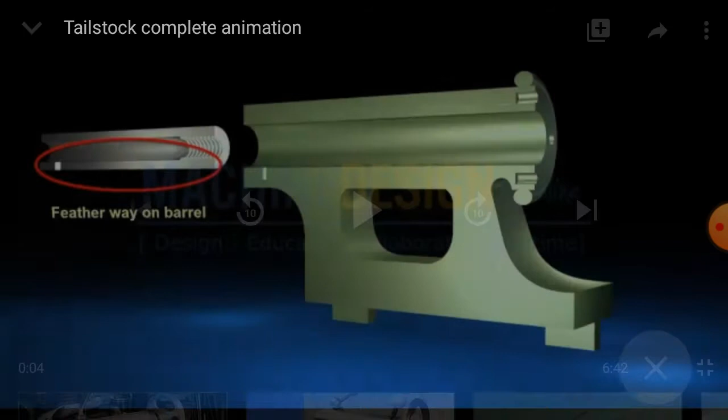If you observe this, tailstock is the rear portion of a lathe machine. I think every mechanical engineer is familiar with this tailstock. Without having a tailstock, a lathe machine cannot fulfill its complete work. So a lathe machine has a headstock as well as a tailstock. Tailstock is at the rear portion and headstock is at the front portion. Workpieces are going to be kept between the headstock and the tailstock if the length is very large. So tailstock plays a vital role in performing machining operations on the lathe.

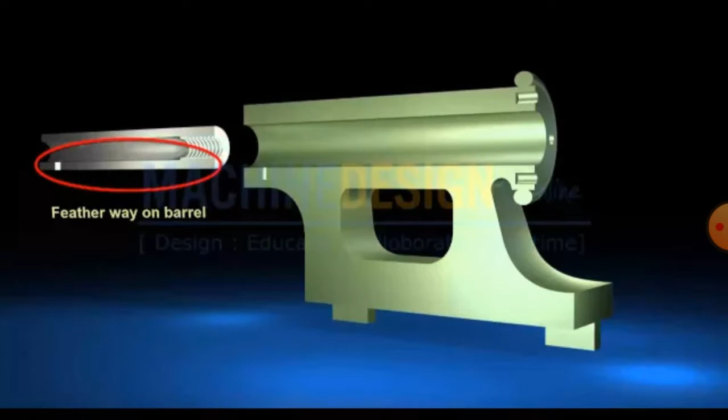So lathe is one of the widely used machines, or we can say one of the familiar or useful ones to all mechanical engineers. As a part of this assembly diagram, I have taken this tailstock in this class. Why this tailstock? It has nearly 7 parts which have to be assembled. So let us have a look at how assembling is going to be done in this tailstock portion. If you observe this one, tailstock is going to have a number of features.

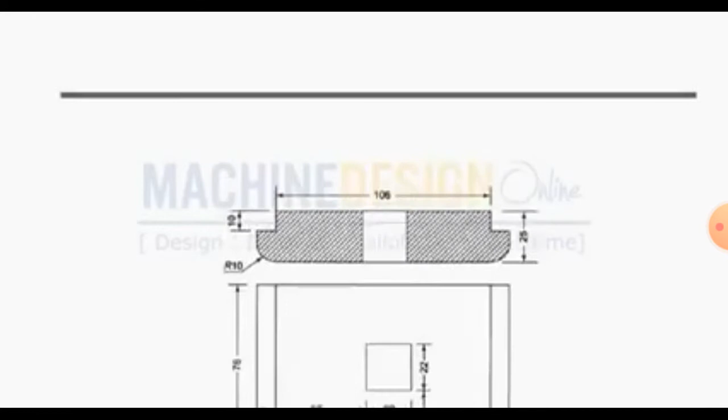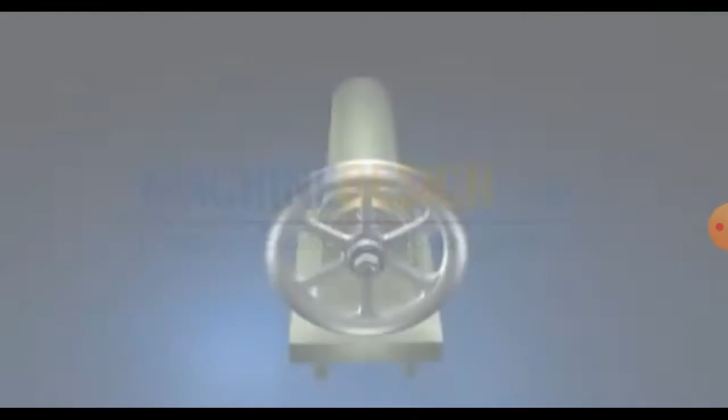First one is called the body. Second one is called the barrel. Third one is called the spindle. Next one is center. Next one is nut. And next one is the clamping plate. Next one is the spindle bearing. And next one is washer and feather key. And a hand wheel is there. So all these have to be assembled in the given body. So if you observe, this given body contains center, hand wheel, clamping, screws; all these are going to be assembled.

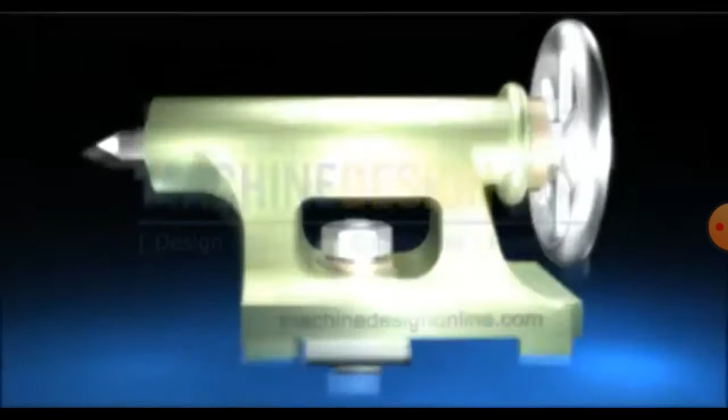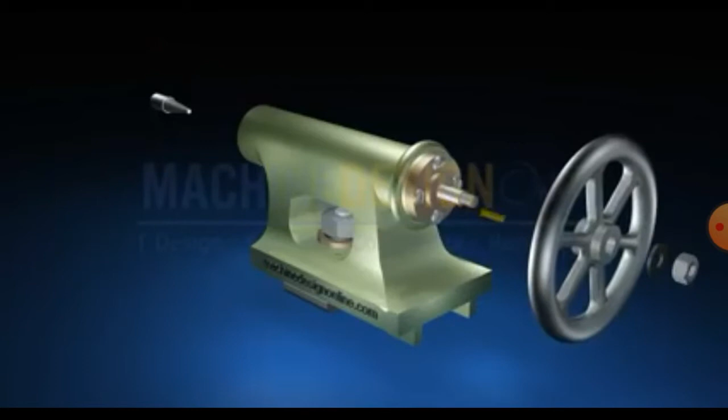Now you are going to visualize how the line diagram of this is observed in the form of grid lines I have shown. First one, this is called a center, which holds the workpiece at the rear part. This one is called the nut and washer. Now we are going to see how these are disassembled. This is the hand wheel and we have a feather key, screw. Those are going to be removed from this one if you observe this video.

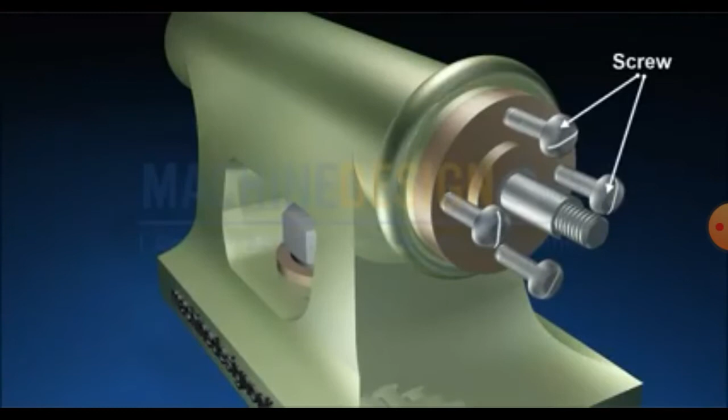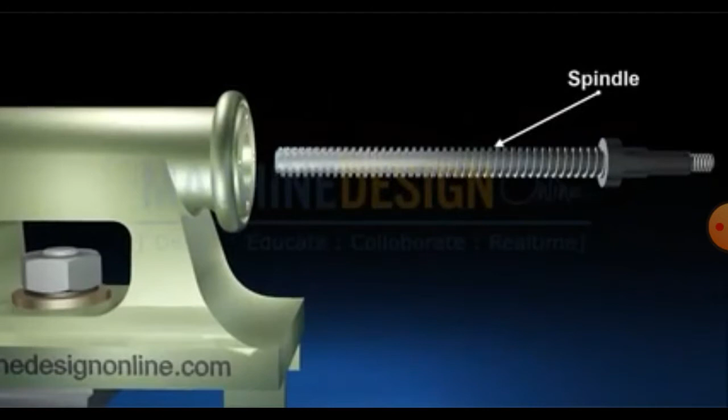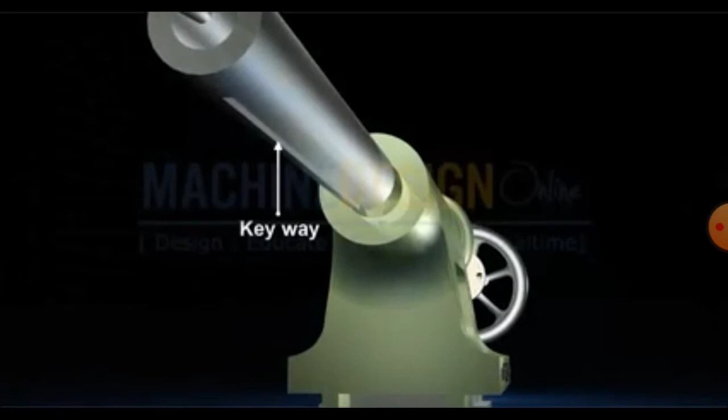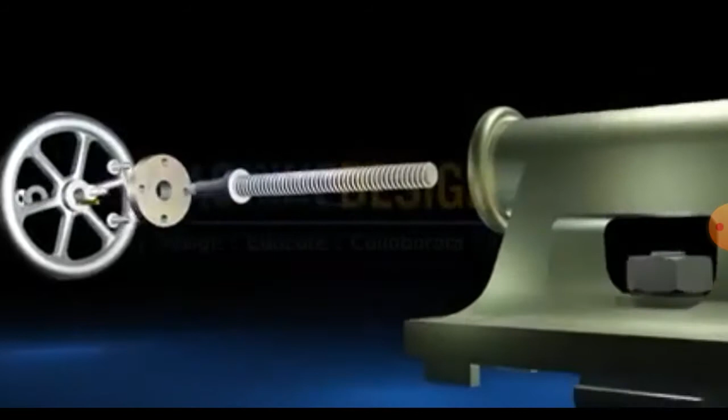Next, we have a barrel. That barrel is assembled with a spindle bearing. We have removed this spindle bearing. Thereby the spindle comes out of this body. Next one is in the front portion. We have a barrel. Already I told this barrel is assembled to the main body. In the barrel a slot is there for a key, which arrests the motion of the barrel.

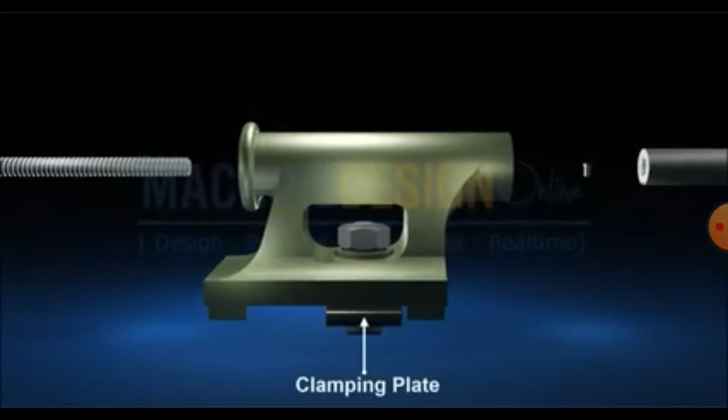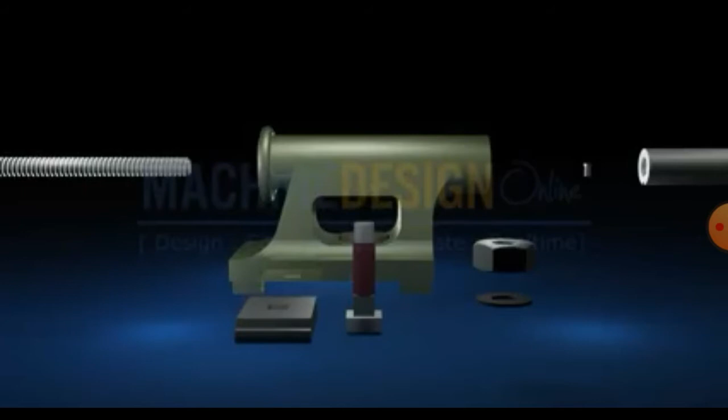So if you observe how the parts are, all these parts have to be assembled here. This is the last portion. That means after assembling the tailstock, this has to be assembled to the lathe at the bed position. That means on the bed we are going to assemble with nut, clamp and a screw with washer. So this is the main body. One is called the front view and the second one is called the left hand side view. The dimensions are going to be matched here.

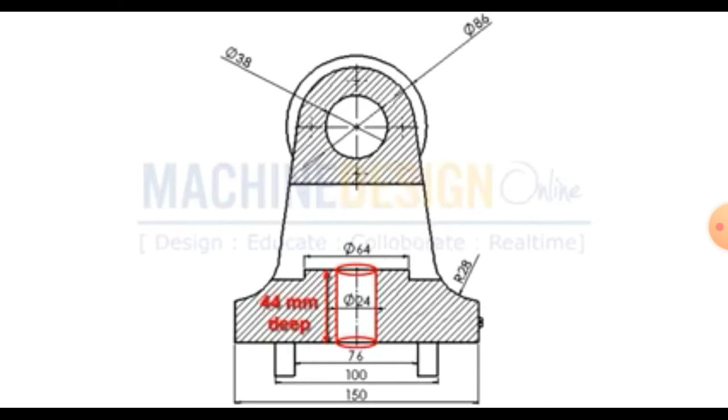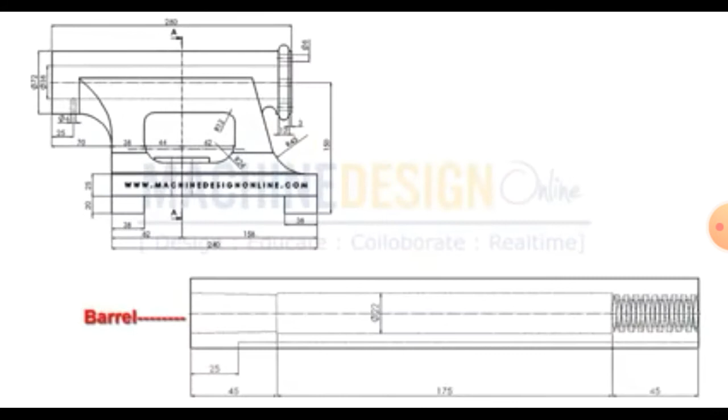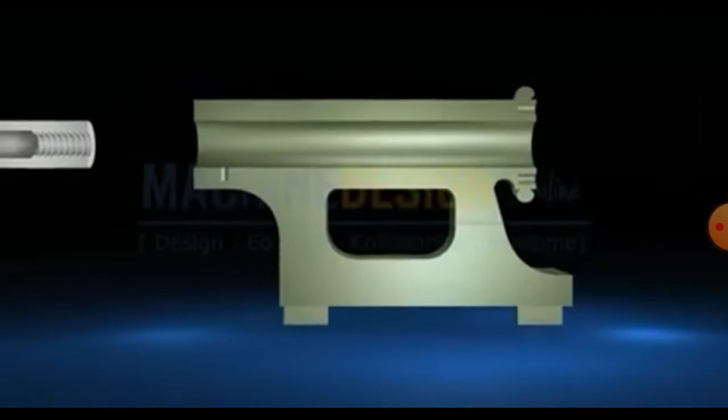Next, this is the main body, and the main body has a number of dimensions, and this is the position where we are going to keep the barrel in the main body. The barrel diameter is 38, length is 175. So the 38 diameter can be matched with the 38 barrel diameter. In the body we have an internal diameter, here we have an external diameter, so these two can be matched. This is how the cross section is observed after fixing the barrel in the main body of the tailstock.

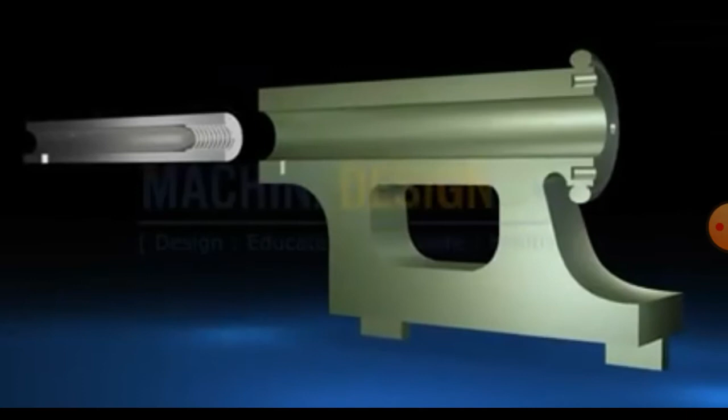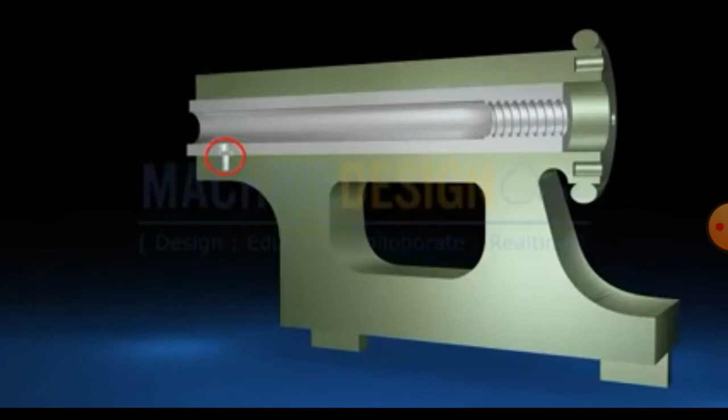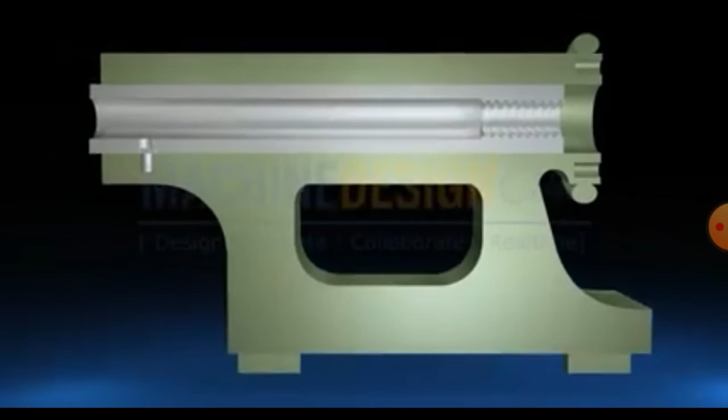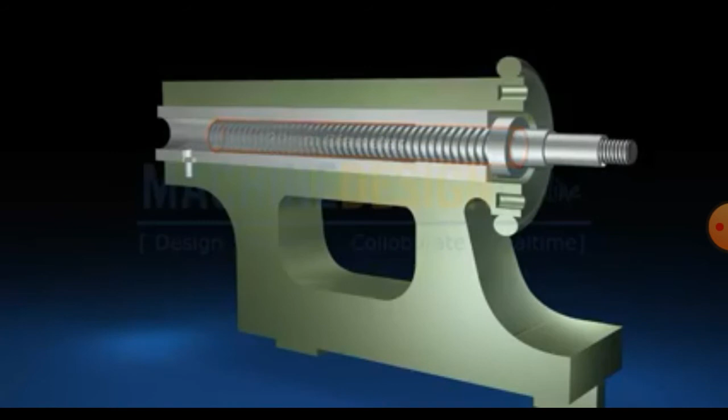So the second part is the barrel. We have matched it like this. As the barrel has a slot, as already told in the previous slides, we have a key. That key is going to be assembled with the barrel in the main body. Then we have a tapered hole. This is an internal square thread to fit the spindle. So this is called the spindle. Spindle has a square thread. Barrel is going to have a square thread. So these two are going to be assembled with each other, as the red line shows how the diameters are matching.

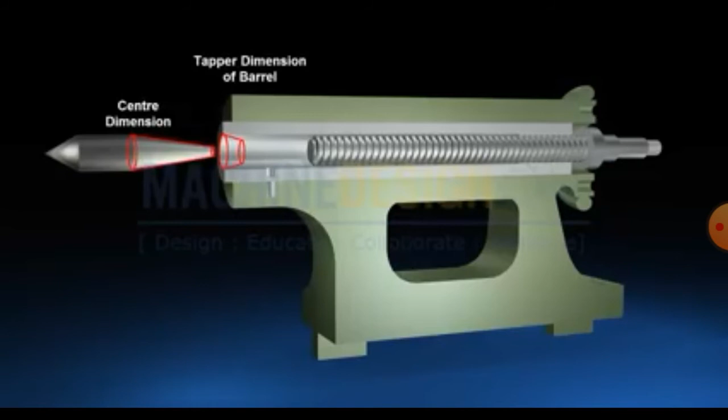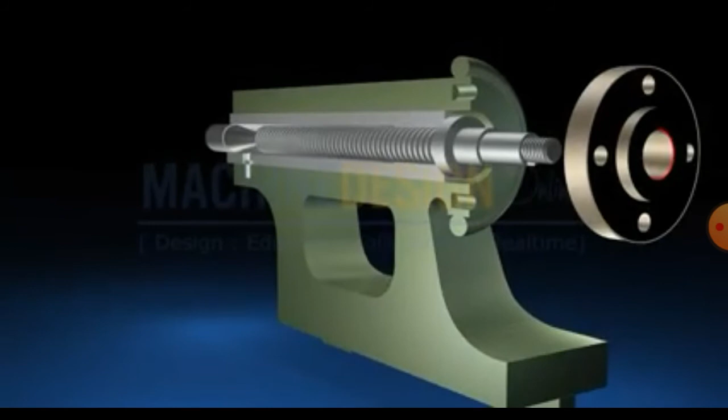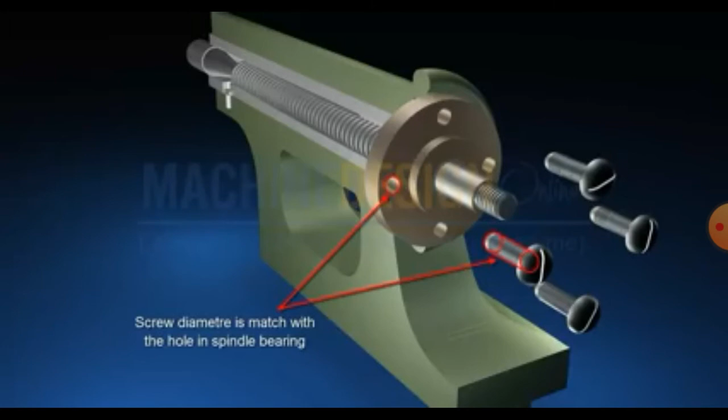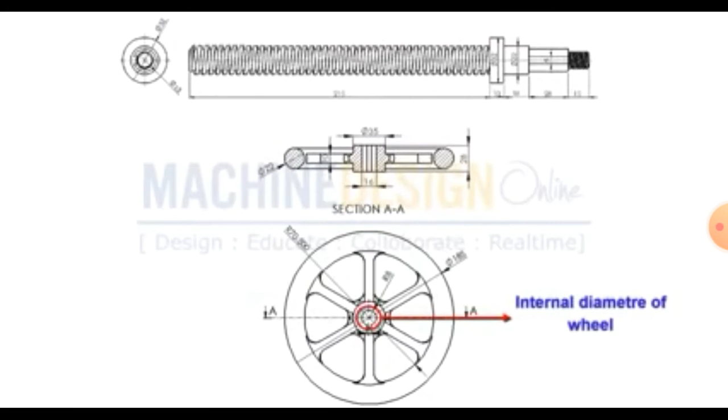Next, if you observe this one, this is called the center. Center is going to be assembled with the front portion of the barrel, as you can see on the screen. Next, this spindle is assembled with the hand wheel at the rear portion. The dimension 18 mm is matching with this 18 mm of the spindle. That's why these two can be matched. The spindle is assembled to the main body with the help of four screws. Already these are displayed here. These screws fit into the main body, thereby arresting the movement of the spindle inside.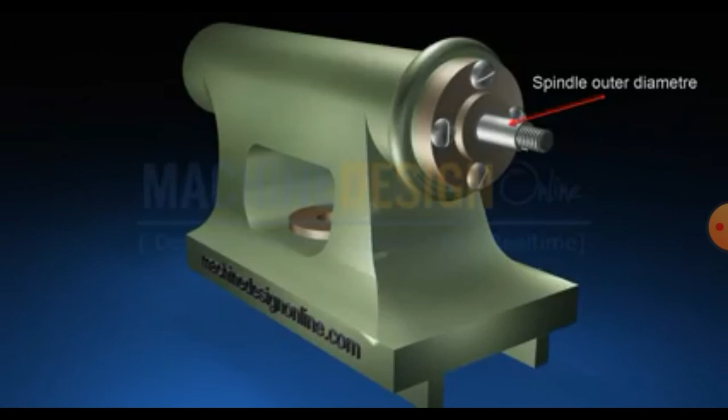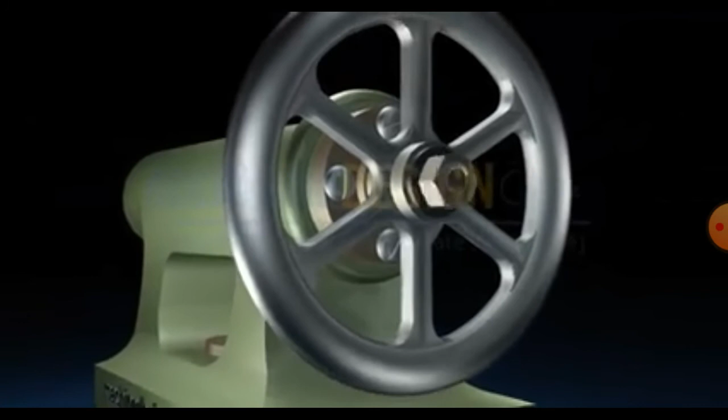Next, after that, we are going to fix the hand wheel. Hand wheel is assembled to the spindle with the help of a feather key slot, so that it will fix there. So when we rotate this hand wheel, inside we have a barrel. The barrel rear portion is the spindle that is going to be rotated.

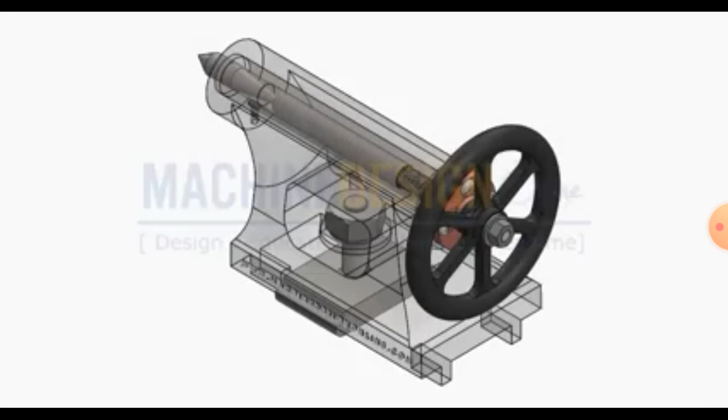So these are the elements to fix the tailstock. In the sense, the tailstock is fitted to the bed. So the barrel is the upper portion, and at the bottom side we are going to have this one. That means these are the guideways of the tailstock. We can observe this one. So a nut is there. Nut is fixed to the bed of the tailstock. Thereby we can complete the operation of the assembling.